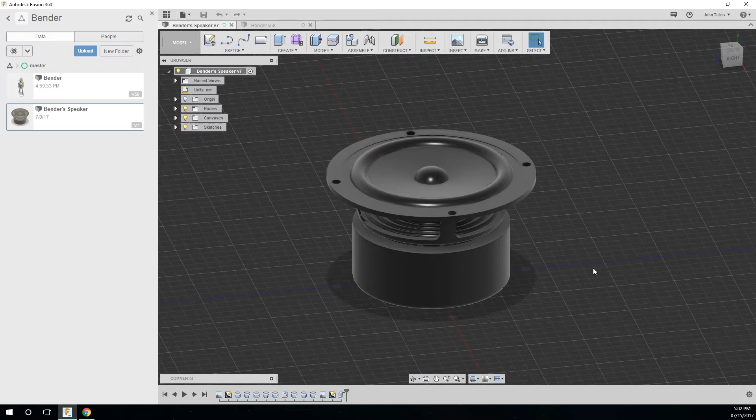A nice thing about the pictures on Amazon is they have the sizes, which was really nice because I went into Fusion 360 and made a mock-up of the speaker before I ordered it, so I could see does this really fit inside Bender. I've been doing this a lot just to make sure things fit. It's easier to figure that out if you actually have it in 3D form to play with.

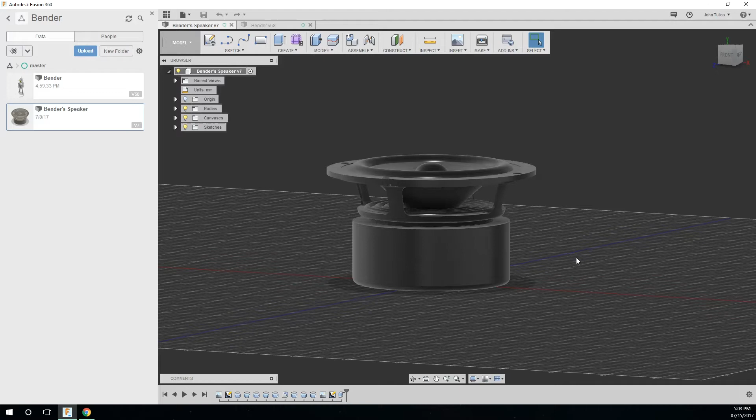I did this before I ordered it. When I got it in, I measured the speaker with a caliper, and somehow I managed to make this mock-up almost perfectly like the real thing without having it in my hand.

So we go over to Bender. We'll look at some of the changes I've made, other than his arm is out like he's supposed to be holding a beer. I might make him a beer later, he doesn't have one yet. He also needs a cigar, but for now, worrying about his electronics.

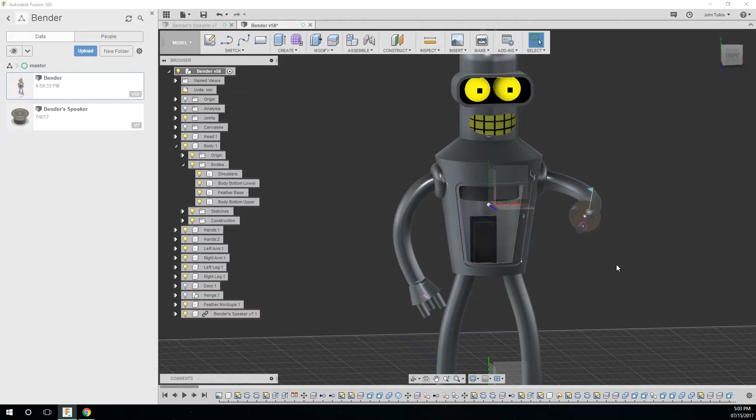So I'm going to take away his door. Where's his door? There's his door. No more door. As you can see with the door, I also put a placement for a magnet so the door will stay in place.

Inside there, you can see I've got a place for the Adafruit feather and feather wing. I made a little mount for it so I can screw in, so if I ever have to replace the part, I can pull it out, maybe.

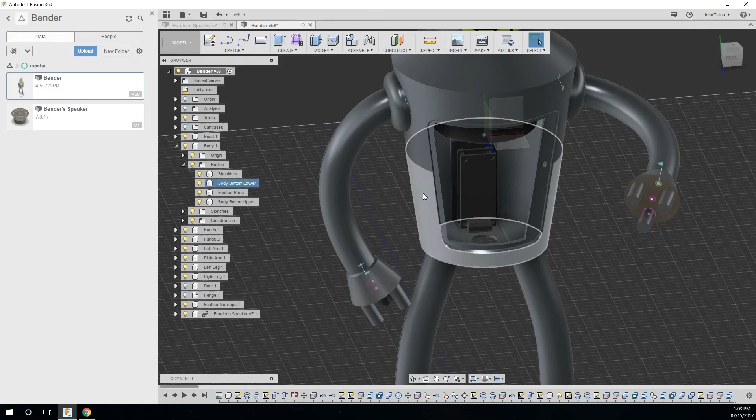Also there's a couple of holes here for the buttons. The first one is for the power button, an on-off button with a green LED. Hopefully it'll light up enough with only 3 volts power. That's all my feather gives out.

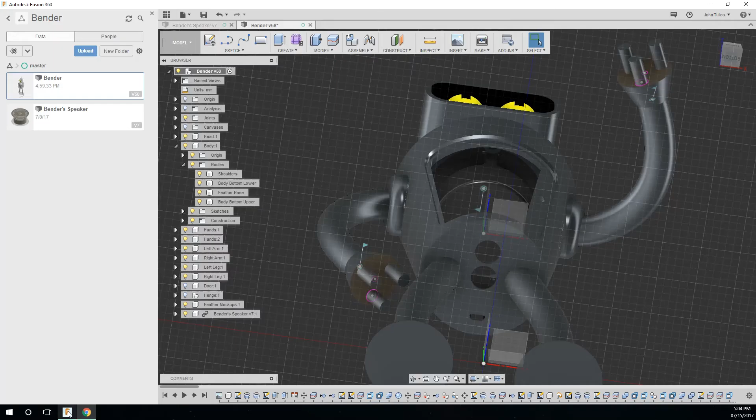I've also ordered one of these, I don't have it yet. This is going to be the button to cause the sound effects, and it's going to have a white LED. I was going to do a small momentary button, but couldn't figure out where I was going to put it on Bender's body, so I ended up doing this instead, because this will mount quite easily, no circuit board necessary. You can see it's got the 2 holes there for the buttons and also a place for the USB so I can charge them up.

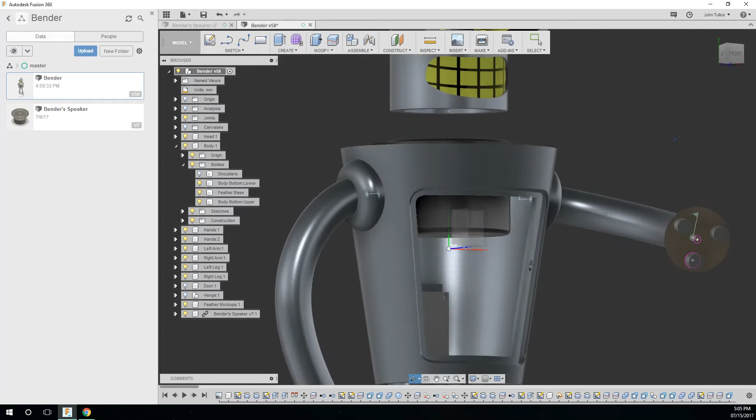Also, you can see the speakers in there and his upper body. It mounts just under the shoulder portion. Let me take that away. You can see it mounts right there, I've got bolt holes for the speaker. Hopefully it'll sound okay, stuffed inside Bender's neck. We'll find out after I print it and put the speaker in.

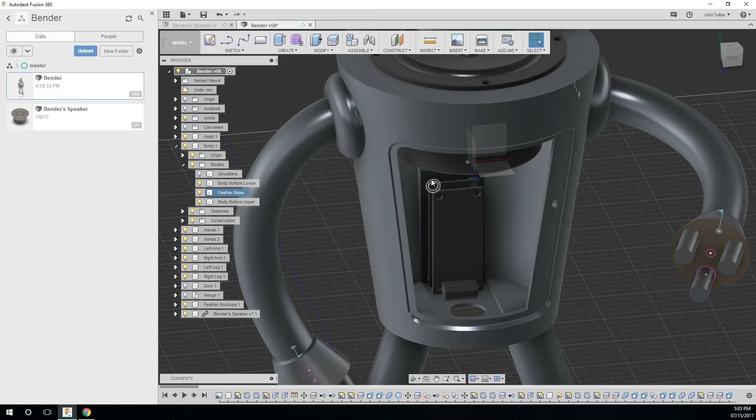It might be a little while, I think this body is going to take quite a bit of time to print. As far as the mount for the feather, I kind of made a mock-up there like I said before. I'm going to show you how I was able to get some nuts to go inside my mount, so that way I have some metal threads to work with. I'll show you that right now.

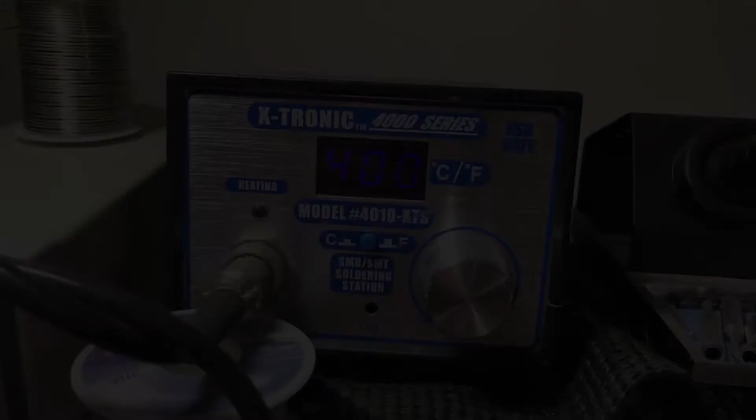Prepare for the stereophonic. I'm setting the temperature to 400 degrees Celsius. Why? Because I'm in a hurry. I know this plastic melts at about 240. New York City! Don't worry about it.

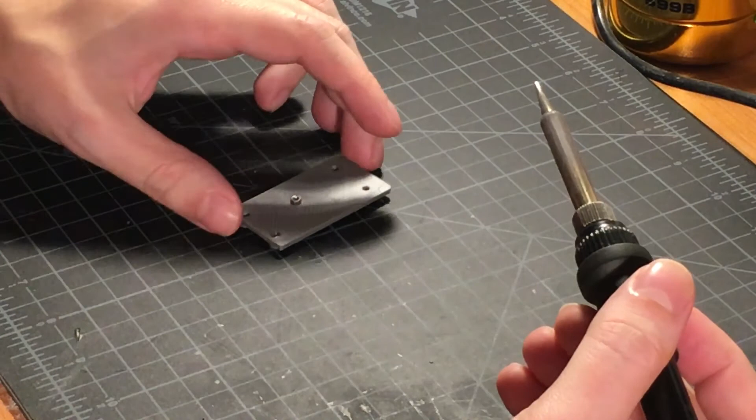Do the robot, baby! Now I have my nuts embedded, so the screws will go in. I will point out that these don't hold extremely well, so maybe a little bit of glue would help. I promise that's the last time I say the word nuts.

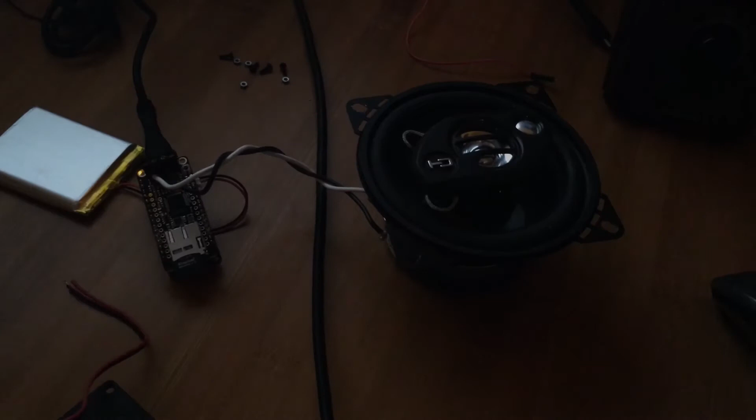Bender audio test 1. Let's see what happens. Hello? I'm Bender. Bodies are for hookers and fat people. Got it. Oh, that's not nice. Peasants.